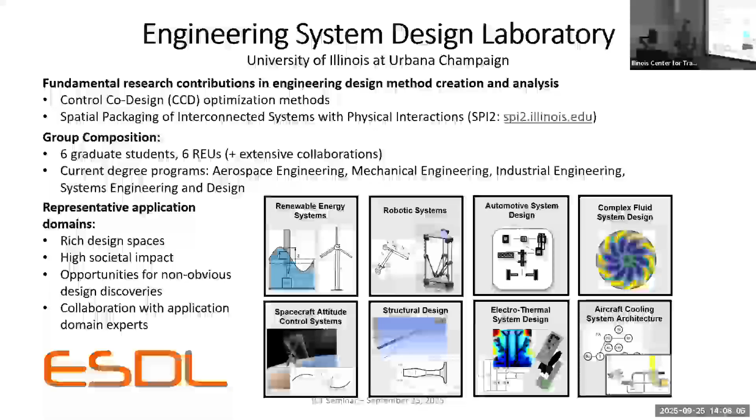We might try creating new engineering design methods, it's helpful for us to go through this process as an outsider. We might see things that people who are in the thick of the design problems might not see. Beyond that, we need to do some kind of analysis of these methods.

This is largely an empirical process. We mainly do computational experiments. We do some hardware work, but it's mainly a demonstration that our design methods actually work in practice. So the empirical data we use is mainly derived from the computational experiments.

And then ideally, we add to the engineering design body of knowledge, and it actually gets used and adopted in practice. And we have had a few experiences where our methods and tools are getting used in industry. It takes a very long time for that to happen. That's one of the main goals in my research, is to have a real impact on how systems engineering and design is done in practice.

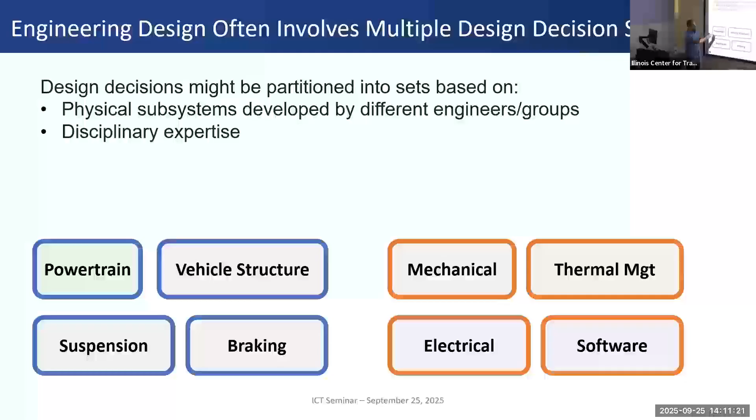Another common lens to think about multiple sets of design decisions is disciplinary partitioning. So maybe we have decisions in each of these disciplinary domains for one of these subsystems in the physically partitioned approach.

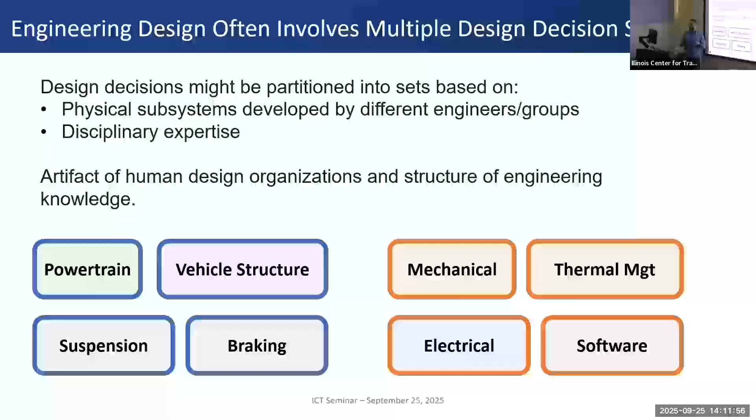A lot of this is really an artifact of the human design organizations and how we've structured engineering knowledge. The boundaries of engineering disciplines has evolved over time, and that to me seems to be a synthetic artifact largely. And when we design a system, in reality, all of our decisions can be interrelated, and we need to figure out how to account for those interrelationships as we are making design decisions.

So let's formalize this just a little bit. Let's suppose we have a system design problem that has at least two different sets of design decisions, say if we're designing...

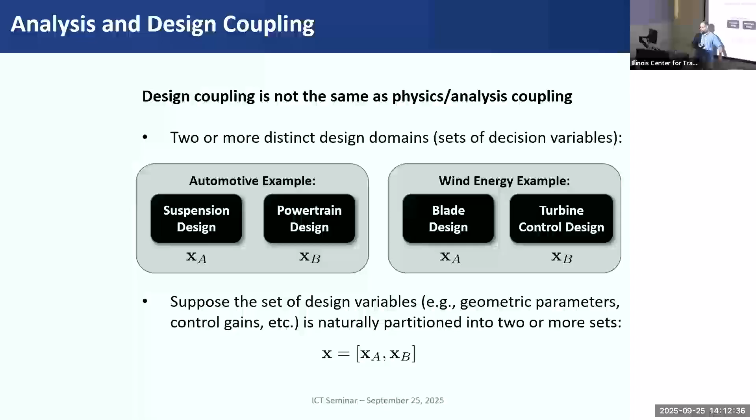If we ask this question, it helps us start understanding what design coupling is. If we make design decisions or changes in one of those domains, do those decisions influence how we should make decisions in other domains to achieve our overall system goals?

So suppose we have these two domains, each with their own sets of variables. Here, suppose this is an objective function that we want to minimize or maximize. It depends on those sets of design variables. So for example, if we specify the design in domain A, we'd like to answer how should we design domain B to obtain the best possible design, minimizing or maximizing f of x.

So given a value for A, we should choose a value for B that solves this problem. The design variables for A are fixed, but we're adjusting the design variables for B to find out what gives us the best overall system performance. So given a value for x of A, we choose the design for B to be this x_B star, the asterisk indicating that's the optimal value.

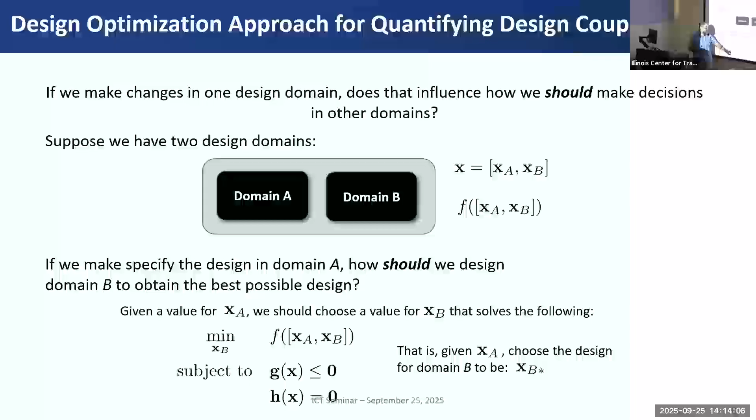With that background, we can define what we mean by design coupling. Back to this original question: if we change the design in domain A, how should we design in domain B from an optimization perspective? Suppose we have a change in design A, we can then find out what is the best decision in design domain B.

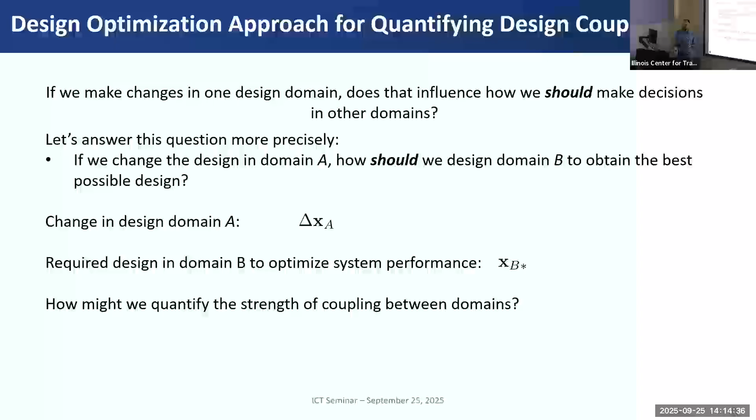We can quantify the strength of the coupling between these two domains by calculating sensitivities. In the simple scalar case, if these are just single scalar values, then this sensitivity gives us the strength of the relationship, at least in one direction, between domains A and B. We can also reverse or invert that sensitivity to get the coupling strength going in the other direction.

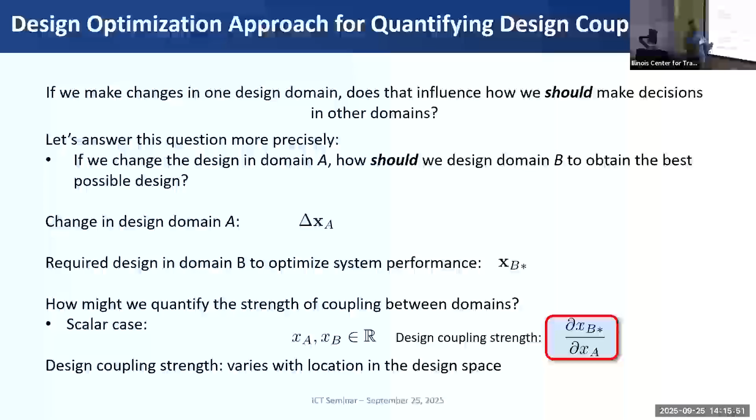Something to keep in mind is that as we move through this combined design space in the x_A and x_B directions, the value of the sensitivity can change. Most design optimization problems for engineering posed this way are nonlinear, and these sensitivities can change. That's part of our current research—looking at how we can account for the global nature of these coupling strength sensitivities and use that to inform things like the actual optimization process, or extracting qualitative insights from this quantitative information.

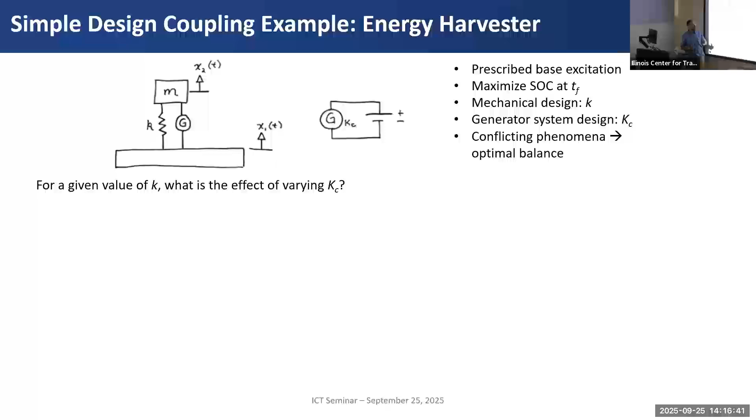What's the effect of varying Kc, which you can think of as a control gain? How aggressively should we be extracting energy out of the system? When charging or generation is less aggressive, increasing this gain will initially increase the force, which increases instantaneous power and the energy harvested. However, if we keep increasing how aggressively we're extracting energy from the system, eventually it's going to reduce amplitude, reduce velocity, and the energy starts to drop off.

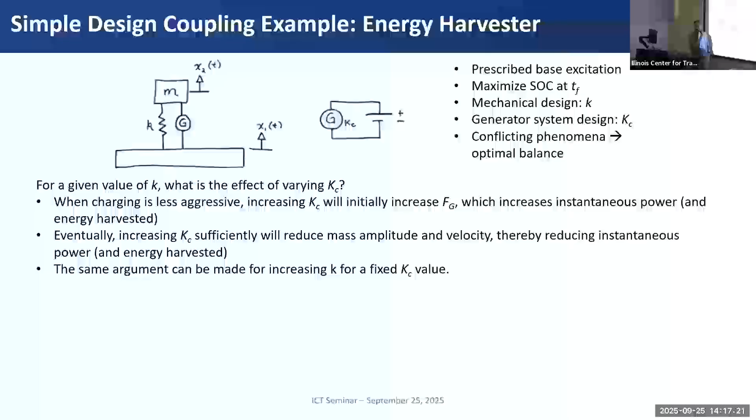The same argument can be made from the other direction, increasing stiffness for a fixed value of the control gain. In this problem, there is present what we might call analysis or physics coupling. I think it's important to make a distinction between analysis coupling and design coupling—they're related, but they are two different concepts.

If we have this physics coupling present in a system like this, it means that our mechanical behavior influences the electrical system behavior and vice versa. So if we have models of the overall system, we might have a coupling of state variables between these two aspects of the system. That's different from design coupling, but this sort of physics coupling often does give rise to design coupling.

Here, in this case, we have bidirectional design coupling, and a way of thinking about that is: for a given value of stiffness, what's the optimal gain for the controller? For a given control design, what is the optimal stiffness for the system? And then we can quantify those sensitivities, thinking about each direction using those values.

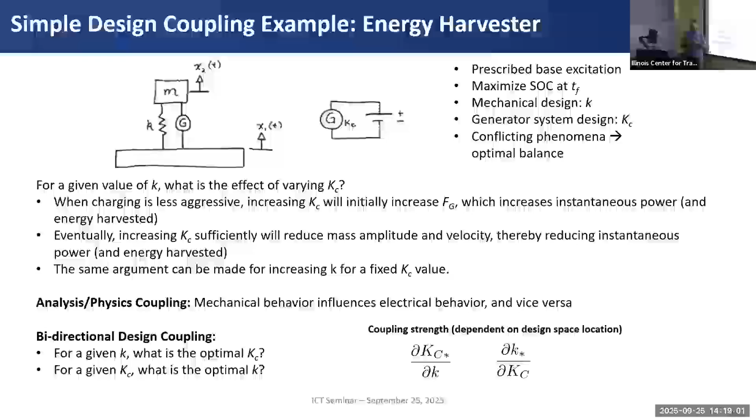Of course, this is a super simplified version of the problem where we only have a single variable in each domain. Things get a lot more complicated as well. Often we do work in open loop optimal control, and so we're not using scalar parameters for our control design, but rather trajectories, function-valued quantities. That makes things a little bit more interesting.

Here are some of the more complete quantifications of design coupling. If we have multiple variables, then we really have a whole matrix, or Jacobian, that describes this. And this Jacobian can change over the design space—so it is a really complicated quantity, but it can provide value in different ways.

We might be able to identify relationships that are not quite as important, and then instead of solving a problem all simultaneously, we could break it up into sub-problems and solve them in sequence in a way that ignores some of the couplings, but not all of them.

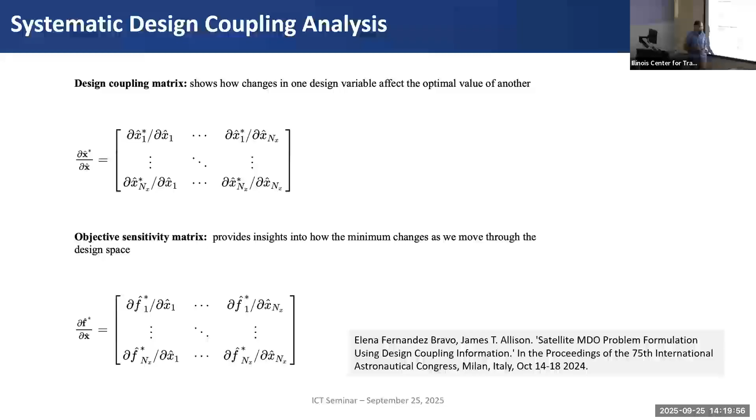This is part of my background as well, where I had this really great opportunity while working at MathWorks, where every day I ended up talking to controls engineers, mostly in the automotive and aerospace industries. I got to see the perspective of controls engineers and their frustrations with how difficult it was to get these plants, these physical systems, to work and meet requirements. And they wish they could go back and change things.

But it also got me thinking, are the controls engineers necessarily the best people on their own to say what's the best way to design the plant? Really, we need to study the interface. It's not just the mechanical engineers or the controls engineers who are the right people, but we need people who understand the interface between these two domains.

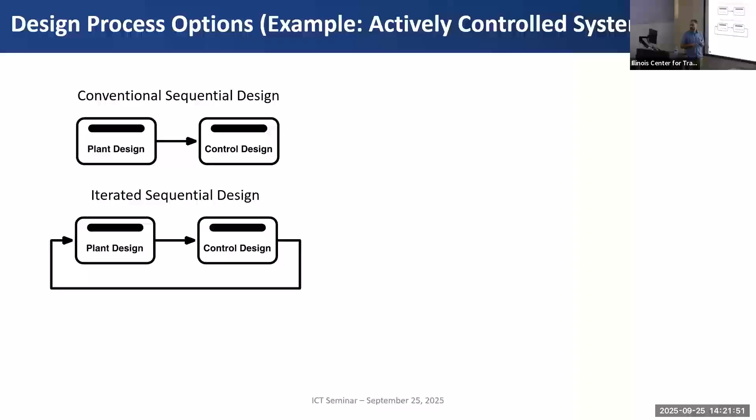One approach to solving this, and in practice this is often what happens, is if there is something that, well, maybe we can't meet requirements through control design alone, we have to go back and make some modifications to plant design. And if we take this process and map it over to design optimization problems, mathematically we can show that this does not always converge to the system optimal solution. It requires a simultaneous approach where we are making decisions about all aspects of the system simultaneously.

There are some mathematically equivalent problem formulations, or they're equivalent to the simultaneous design approach, and that's one aspect of our research: to try to find good formulations that are equivalent to this simultaneous problem, but might be numerically easier to solve.

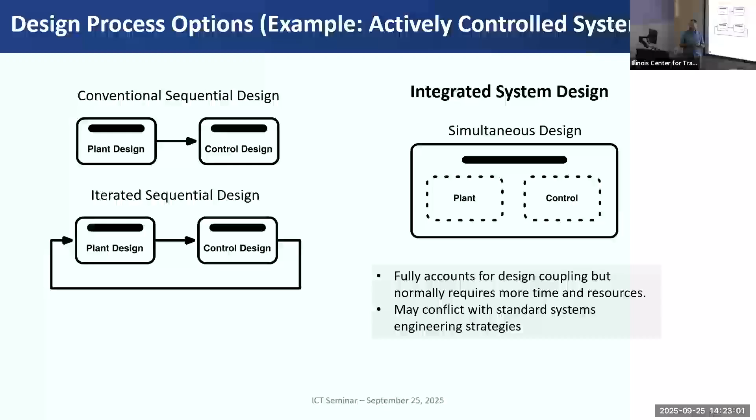So this simultaneous approach fully accounts for design coupling, but it requires a bigger investment to use, whether we're thinking in terms of a human design effort or in terms of design optimization. This means we have to fully coordinate all of the decisions simultaneously. In standard systems engineering practice, we tend to like to decompose things or make problems modular and have well-defined interfaces. And yes, we can account for some coupling with that approach, but this completely holistic simultaneous design approach really conflicts with standard systems engineering practice.

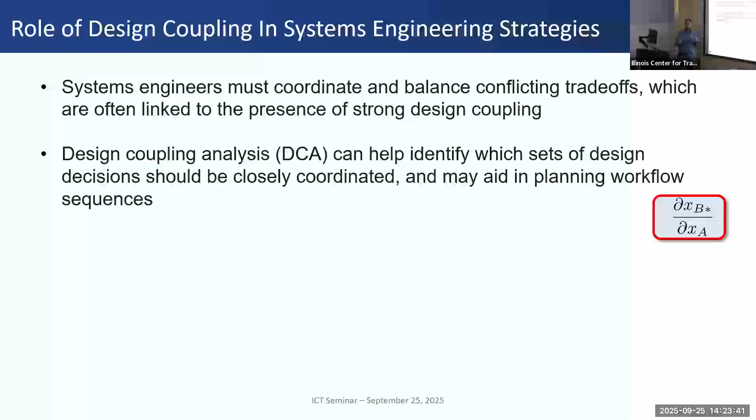Systems engineers need to do this careful coordination and balancing of conflicting trade-offs, but this is made extra challenging when we have strong design coupling that crosses multiple areas within the systems engineering effort. If we can do design coupling analysis and identify some of these sensitivities, that can help us in determining what aspects of this coupling are most important to coordinate explicitly.

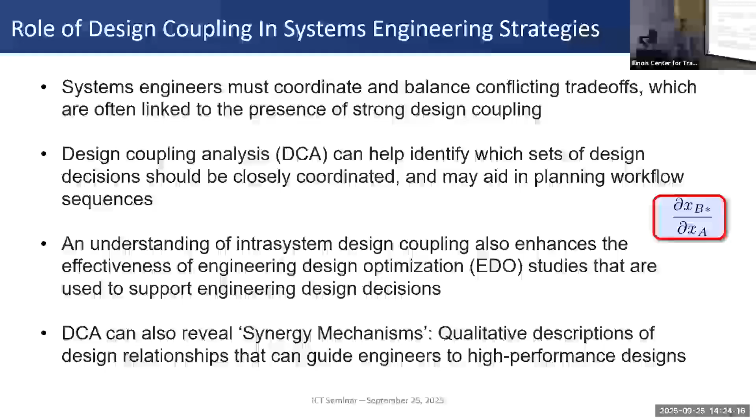A good understanding of the coupling within the system design problem can help us in generating design optimization studies that perhaps take advantage of weak versus strong couplings in the overall system. And maybe we can have some kind of sequential approach, for example, that is easier to solve. Perhaps the most valuable aspect of this kind of analysis is that it can reveal what we call synergy mechanisms.

So I've defined design coupling, but the presence of design coupling provides the opportunity for us to take into account complete relationships within the system design problem, and ideally describe these in a qualitative way that helps engineers who are leading aspects of the system design problem to do better with their problem.

I do a lot of work in wind energy system design, and one of the main folks who's been an advocate of using these more integrated approaches in wind energy systems describes an interesting synergy mechanism qualitatively. This person is the current ARPA-E program director, Mario Garcia Sanz. He intuitively, years ago, latched on to this particular synergy mechanism and got really excited when the work from my group was able to formalize and help us approach this in a quantitative way.

So one of the basic synergy mechanisms in a wind energy system is a standard controller for controlling the generator. The turbine uses maximum power point tracking. Essentially, we can use a simplified model of the system and determine what should the resistance torque of the generator be, the blade pitch, and so on, to maximize how much power we're extracting out of the wind at any given point in time. And that's great, but that can result in really high loading, pretty significant fatigue damage to the structure, to the gear train especially.

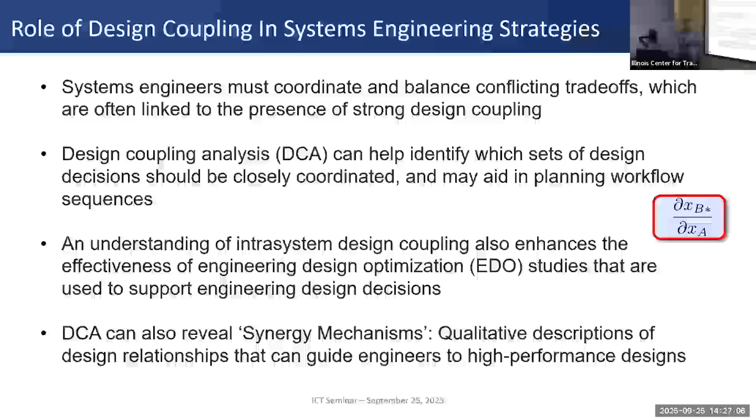So with these kinds of analyses, looking at different types of design coupling within a system problem, that gives us the opportunity to identify these more complete relationships or synergy mechanisms, like the one I described with wind energy.

Okay, control co-design. There's a lot of interesting stuff we can go through with control co-design, but I want to make sure we have a little bit of time for questions. I've already described my combination of experiences. I was trained in my PhD as an engineering system optimization person, but my industry experience also really contributed to the ability to frame this problem and help us have some success.

Through both these ARPA-E projects and others, we've come full circle, and now some of the tools coming out of my group are being used by large companies in designing wind energy systems.

So this other area I want to talk about is SPI2, spatial packaging. This is another one that involves some really interesting complex design couplings. It involves the design of pretty much any kind of interconnected physical engineering system where you need to fit stuff in some kind of constrained space. And there are physical aspects to the problem too—it's not just geometry, but maybe heat transfer is important.

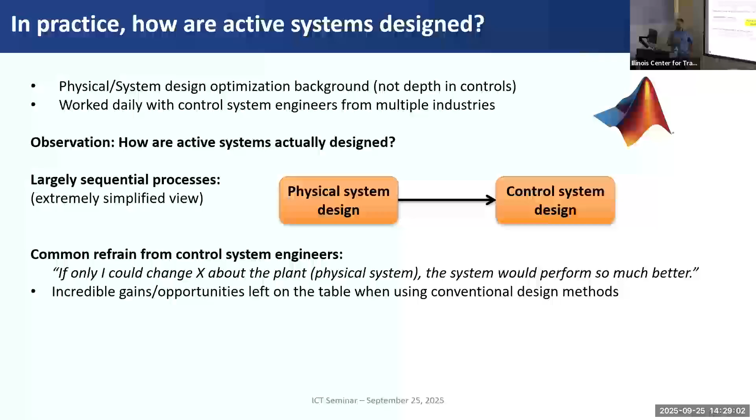I mentioned earlier, one of the things we do is look for mathematically equivalent optimization problem formulations—things that are equivalent to this ideal simultaneous design that might be easier to solve. Nested design optimization is one that tends to be really helpful. For example, if we nest our control optimization within our plant or physical design optimization, then we can take advantage of algorithms tailored for solving the optimal control problem. That has tended to be very successful, perhaps in the majority of the problems we work on.

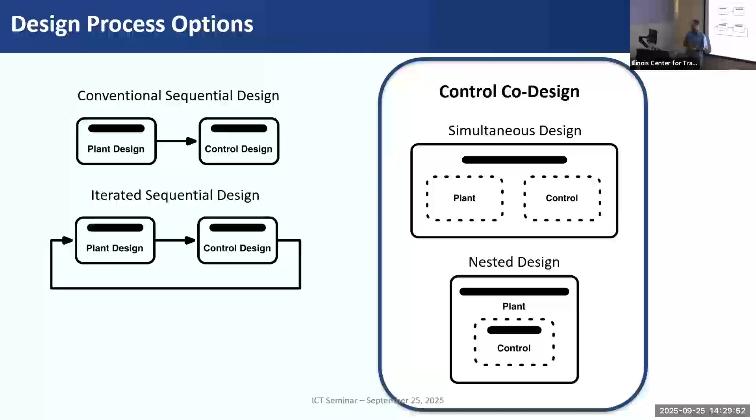Here's just a quick slide showing the basic formulation we use when we use direct optimal control, open loop optimal control methods. We presume we have some system objective function that we want to minimize with respect to our plant and control design variables. We have the optimization not only look at what are the optimal design values, but also resolve the dynamics of the system through constraints on dynamics, basically physics constraints.

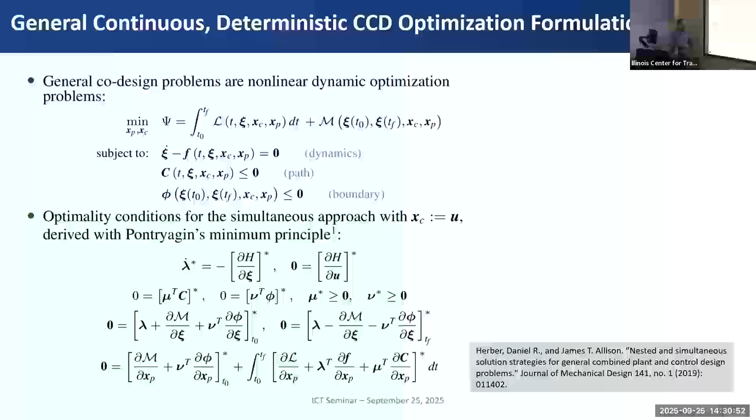We often will have path constraints. These are really important in things like failure modes for the system, looking at temperature limits, stress limits, those kinds of things. So resolving those path constraints is quite important. We can also derive optimality conditions for this formulation, but most often we have to solve these numerically, of course.

A couple of examples from control co-design. One is in spacecraft attitude control. The local news here, WCIA, is actually leading up to Lara Waldrop's NASA mission. They interviewed me about this attitude control technology, and it aired on Monday. But the basic idea is we have a lot of distributed mass in a lot of spacecraft, either solar arrays or antennas, and we could use that mass to our advantage.

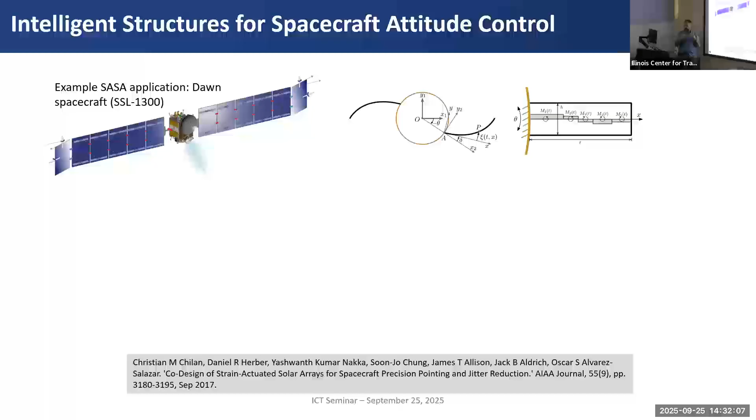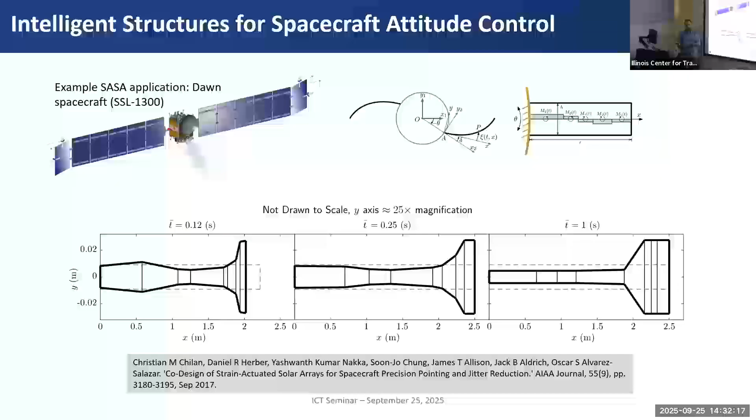We've been working on using piezoelectric strain actuators distributed across appendages, whether arrays or antennas, bending those arrays, and with conservation of angular momentum, using that as a way to orient or point the spacecraft bus, the main vehicle. If this is a space telescope or a communications device, that pointing accuracy is really important. So we boil this down to a distributed control and distributed structural design problem. And with control co-design methods, we found some really interesting tailored shapes that get us the best passive dynamics that synergize with the active control of the system.

This also led to a new discovery that not only helped us get fine pointing precision, but with the piezoelectric actuators, nothing else—no flywheels, no thrusters—we can get complete slew control or rotational control of spacecraft without using flywheels. Let's see, that video is not working.

It's kind of like how a cat falling through the air goes through a similar pattern of motion to right itself.

And it's been a challenge. We've had NASA proposals rejected because folks think this violates conservation of angular momentum, but it doesn't if you consider the full nonlinearities of the system.

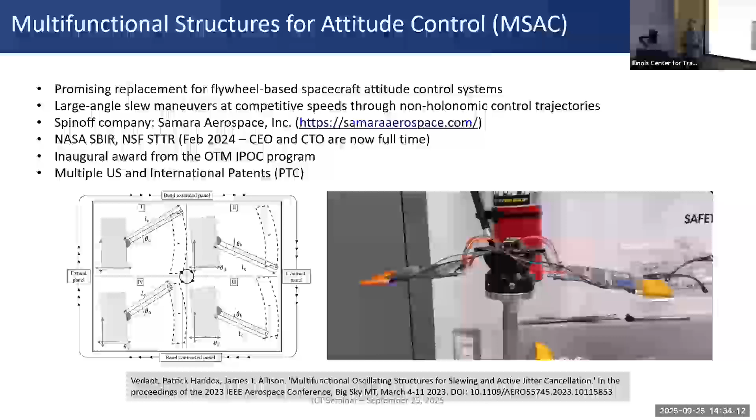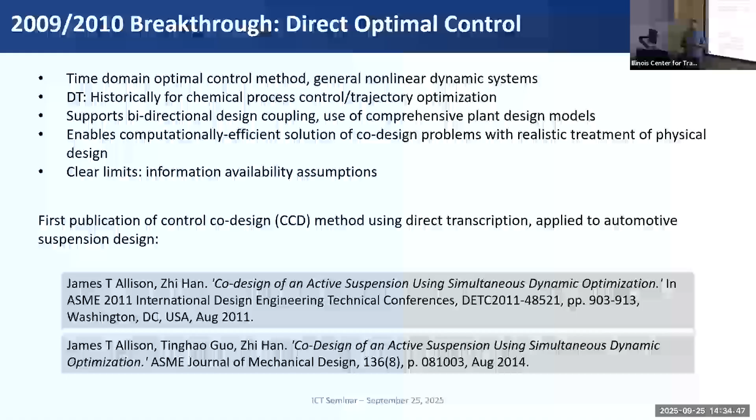I think I'll skip through the history of control co-design. Basically, we made some breakthroughs in how to formulate and solve the problem, which made a big difference in the methods from the world of design optimization actually being useful for design practice. Previously, the methods made a bunch of simplifying assumptions and it wasn't really practical. But we bridged that gap and now these methods are being used in practice.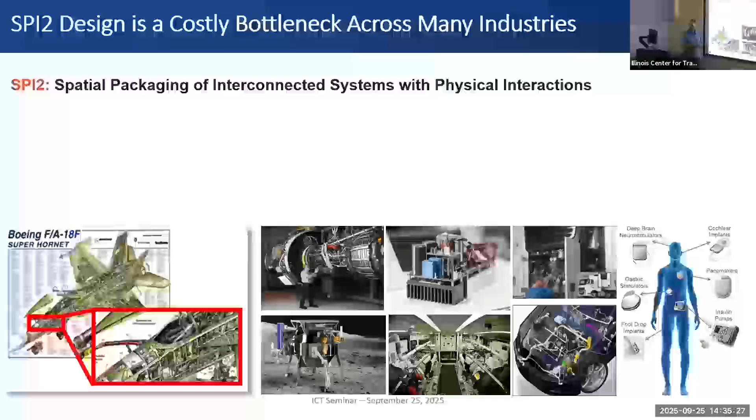Okay, maybe I'll briefly talk about SPI2, what these systems are. Any kind of system where you have a bunch of stuff that needs to be packaged into a tightly-constrained space, and you have interconnects that are of non-trivial size - maybe electrical cabling, piping, or tubing. When it comes to actually designing these kinds of systems in industry, there's always a manual component. There's a lot we can automate, but until recently, this aspect of design has never been automated.

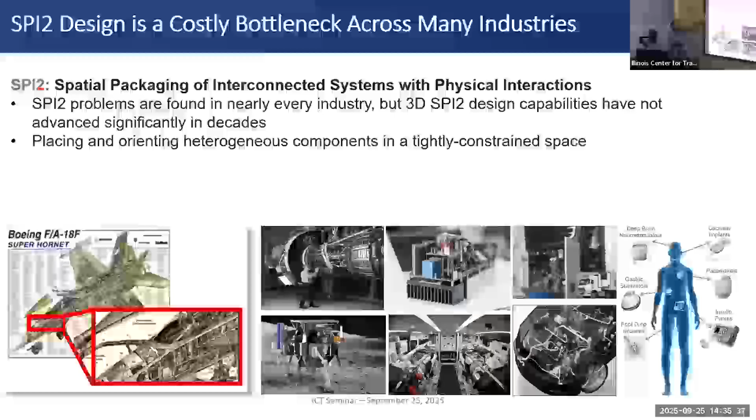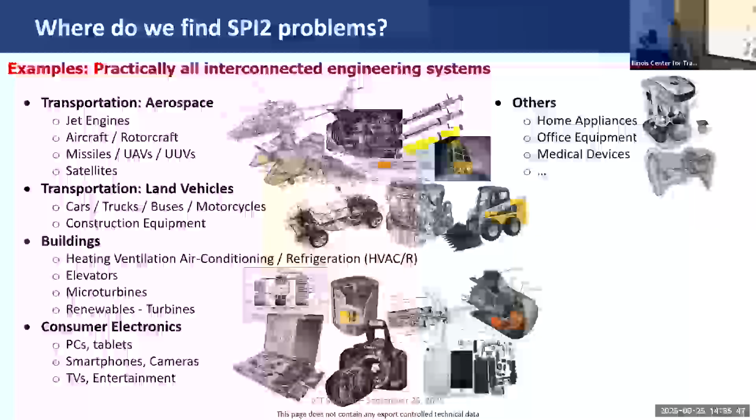Those are some of the main challenges, especially thinking about what's best for the overall system. Here are some examples of SPI2 applications across lots of different domains.

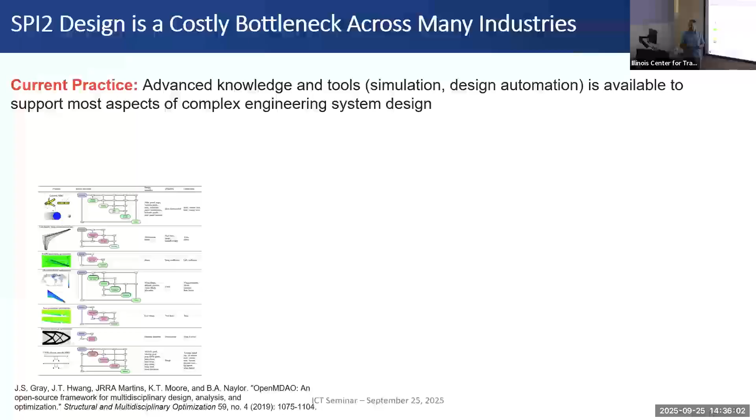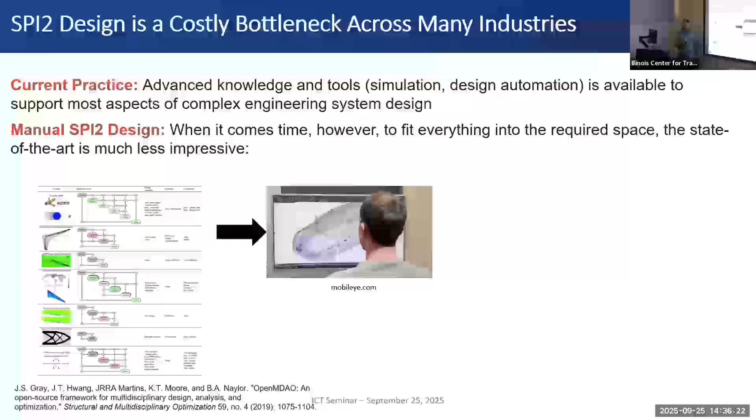As I mentioned before, we have lots of great tools that help support design decisions, but we don't have any design automation - or until recently, we didn't have any design automation for these SPI2 design decisions. It all boiled down to an engineer sitting at the CAD application, trying to work out the best way to put these components and the interconnects while accounting for things like thermal interactions, electromagnetic interference, and other factors.

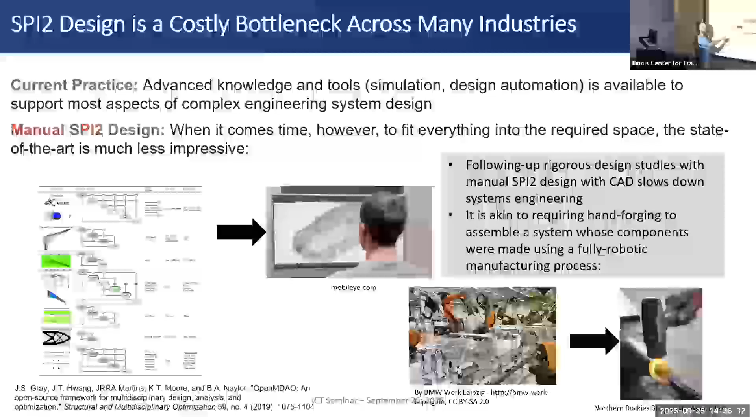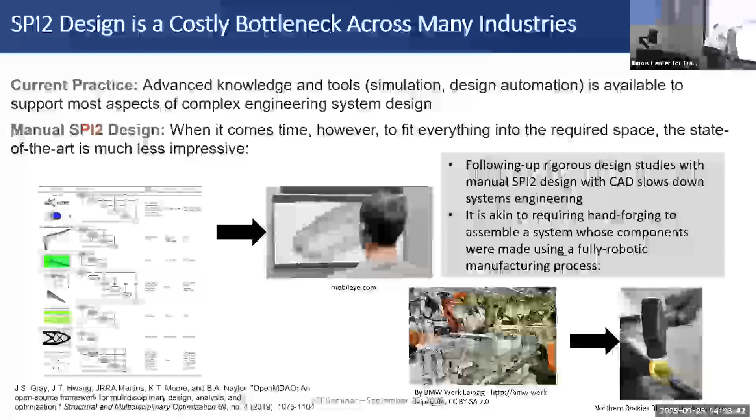So it's kind of like using really advanced manufacturing - making an analogy here. We have really advanced design tools, but really simplistic design when it comes to making SPI2 design decisions. Sort of like having really advanced robotic manufacturing, but in the end using hand forging to do the final assembly.

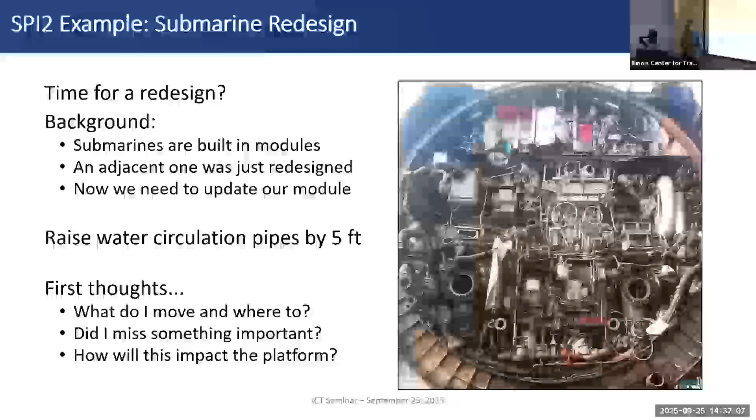Here's an image from a submarine. One of my current PhD students used to work at Electric Boat. He came to work in my group specifically because he was really frustrated with the design practices for submarines, where it's really just through manual trial and error that they figure out how to assemble these really complex systems.

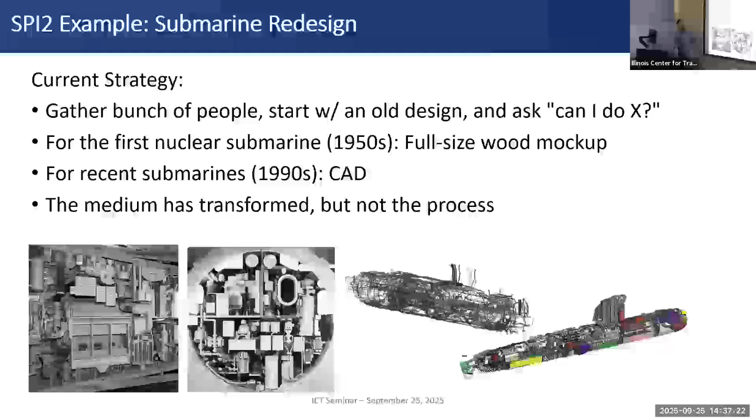Back in the 1950s, they would do full-size wood mock-ups to make sure everything fit as they hoped. They transitioned to CAD in the 90s, but they're still kind of stuck there.

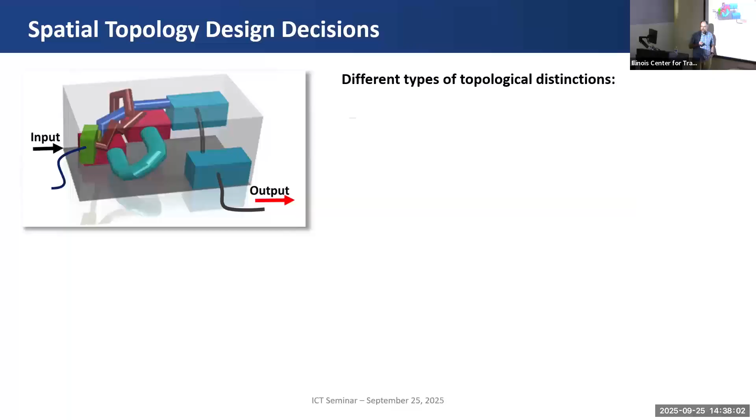Basically, there's been a lot of work done on pieces of the SPI2 problem, such as the geometry-only problem for packing, the interconnect routing problem, and bringing multi-physics into the problem. Each one of these elements is really challenging on its own, but bringing it all together is an extremely difficult problem. One of the big issues is resolving or navigating a certain type of topological decision.

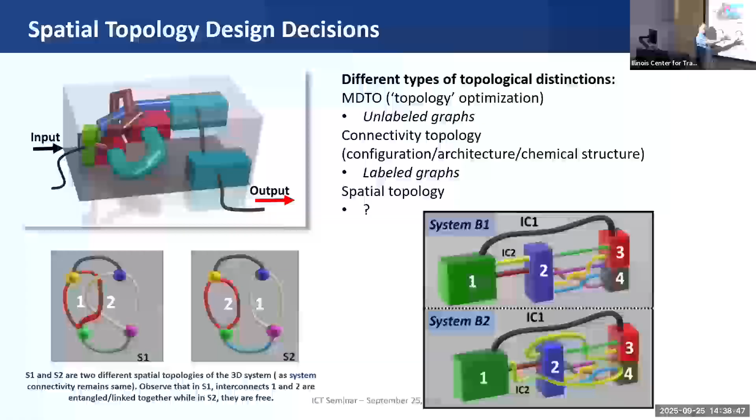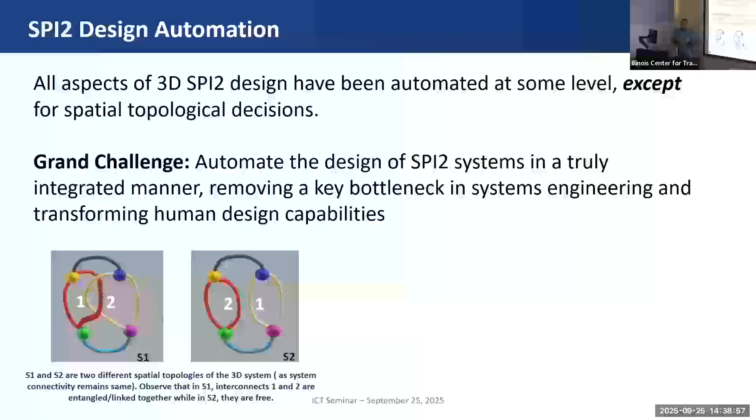Navigating the different options for spatial topologies had never been incorporated into SPI2 system design before. Here's another example of two systems that have the same interconnect configuration but different spatial topologies. This challenge was to formalize these decisions mathematically so we could incorporate it into design automation.

So we did have some recent breakthroughs in SPI2 design. We had this workshop back in 2018 that really helped formalize the problem and helped me understand the potential impact of it. We had a lot of people who were very interested in getting a solution to this problem.

So we were looking at how to represent these spatial topological decisions mathematically. We ended up working with Professor Nathan Dunfield at U of I in mathematics. He's an expert in topology, knot theory, braid theory, these sorts of things. And it was a really exciting opportunity to take results from pure mathematics to make something completely new possible in engineering design.

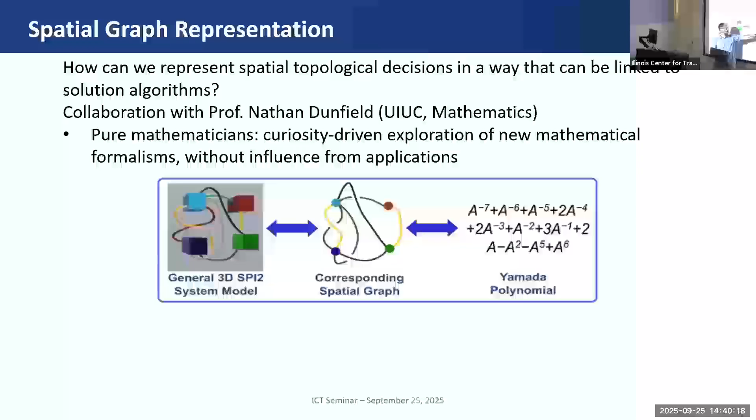One of the solutions that we discovered worked really well is something called the Yamada polynomials. Essentially, we can take a 3D representation of our system, project it onto a plane to make what we call a spatial graph. And then by tracking all of the crossings, it produces a polynomial that we can operate on algorithmically.

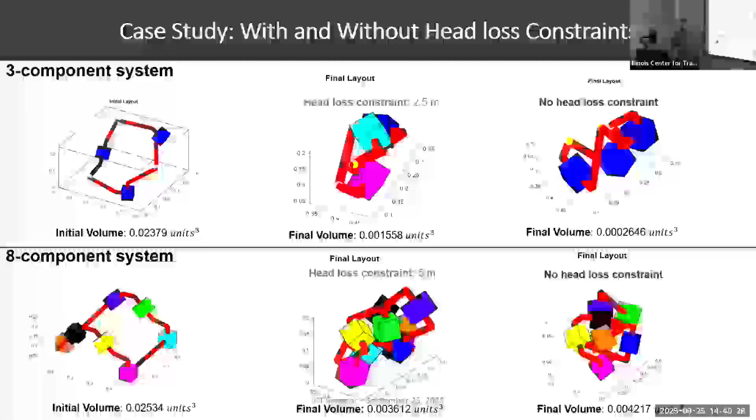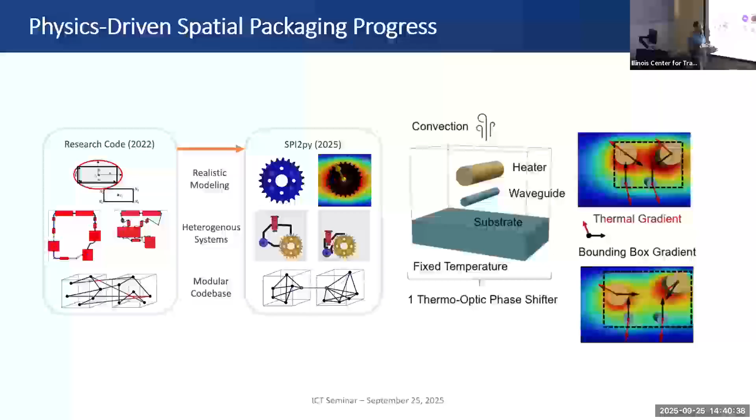So I think that's the main point to get through. We've done a lot of stuff with it with simplified systems. We've worked with Ford, we've worked with Toyota, we have a DARPA project on this. We're looking at other domains, including photonics as well, bringing in different sorts of physics.

We're starting to look more at whole life cycle considerations, things like assembly and disassembly, both with human assembly and robotic assembly, more general components, and integrating additional physics into the problem.

A really challenging thing is dealing with flexible interconnects. For example, Tim Bretl in aerospace, he's a roboticist who looks at manipulating flexible objects of different types. And could we take into account what is possible as far as assembling these flexible components with robotic systems and making decisions about how to design these SPI2 systems?

We're using machine learning and other strategies to scale these beyond the basic algorithms that we started out with.

Okay, I'm going to leave at least a few minutes for questions and discussion. I went through SPI2 pretty quickly, but maybe just tie things together with this conclusion and see what questions are now. If we can explicitly consider and analyze design coupling that's present in engineering system design problems, that can really provide some advantages in systems engineering and design activities.